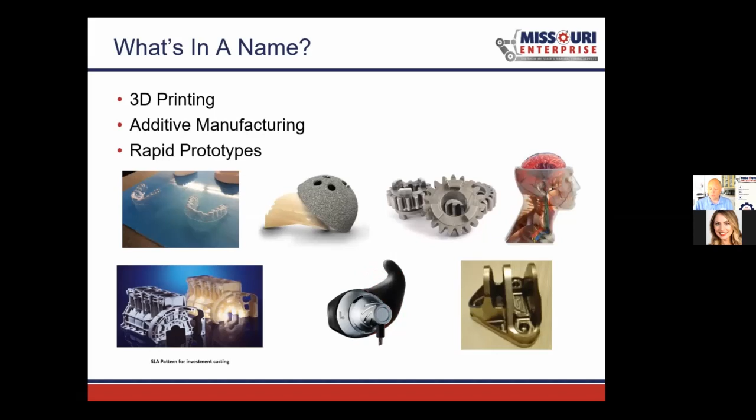This was the first major exposure. In 2013, someone came up with the idea of what if I 3D printed a gun? It hit the news everywhere, on all the different channels, and everybody was worried about this new technology and what that meant for the future. But really it was just something else being created with additive manufacturing. It's really not a good application for 3D printing for reasons I'll talk about, but it shows another example of what can be made.

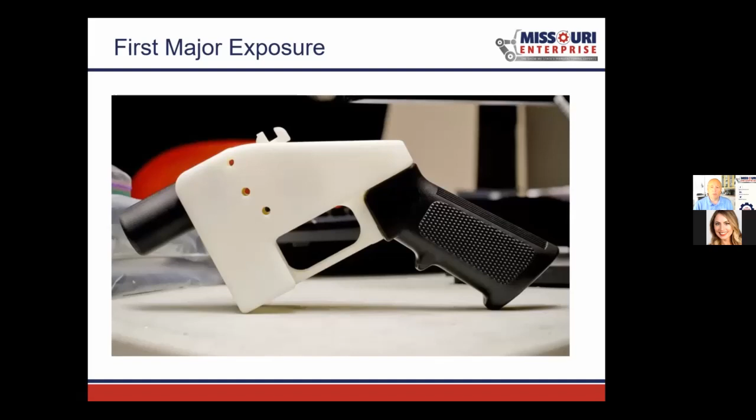So what are some of the reasons why you would or would not use this kind of technology? Start off with the cons. It is significantly more expensive than an injection molded part. If you're going to make a widget out of plastic, it's going to be significantly more expensive, and it's going to take a lot longer to make that part. But there's reasons why 3D printing is actually an advantage.

Sometimes there is some work you need to do after you make the part, whereas when an injection molded part comes out of the injection molding machine, it's done, it's ready to go. But sometimes with 3D printing, you need to do some post-processing.

Large parts are hard to do with 3D printing. It's becoming a little easier, but it is hard to do. And also the materials and the mechanical properties of those materials sometimes aren't nearly as robust as what you would find in injection molded or other manufacturing processes.

But let's talk about the pros of 3D printing. This is where it really shines: you can get very complex. You can have the whole thing come out of the machine and it's done. It's already assembled. Multiple parts can be built as one.

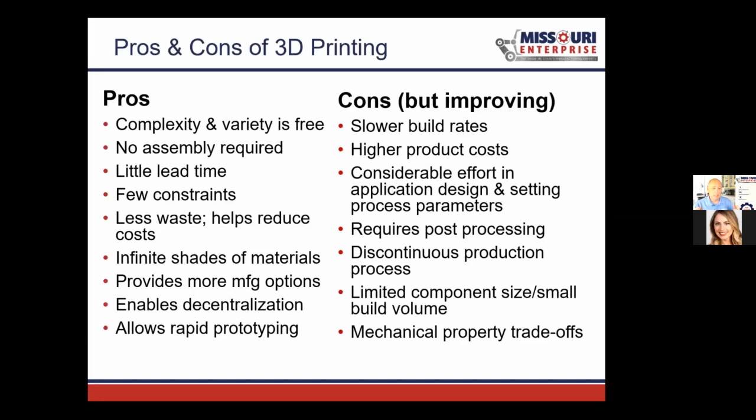But let's talk a little bit about the different types of additive manufacturing. We kind of break it into 7 different food groups here. I'm going to go through each one, explaining a little bit of detail about what that means. There's all different kinds of materials: plastics, metals, sand, glass, concrete. I've seen houses 3D printed out of concrete. Ceramics, even food. You can 3D print different types of food.

Now the food I'm showing in that picture there does not look overly appealing, but it's just a process, and it's something that can be done. Anything that can be liquefied or extruded, different things like that, can be made into an additive manufacturing product.

Applications, what are you using it for? You can use it for so many different things. And this list just keeps growing. Originally, it was just for rapid prototypes of the parts, but now they've realized you can make the molds out of it. You can make medical things, surgical. Medical and surgical are really growing because everything's custom, because everyone's anatomy is slightly different. You can use it specifically for the anatomy of the person that you're making the part for.

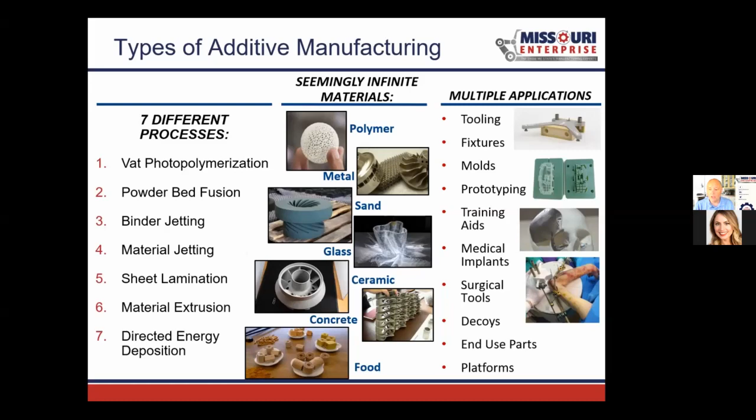So let me go through the list of the different processes and the advantages and kind of disadvantages of why you would use those. The first one is vat photopolymerization, which is a mouthful. Imagine a tub or a vat, maybe let's say a foot by a foot by a foot deep. It's a container. And in that container, there is a plate or a table. And that table is on a cylinder that can move up and down within that vat.

Now you fill that whole vat up with a liquid. It is a resin, or a liquid that's kind of a liquefied plastic. You take that plate, that table, and you move it down very slightly. What it's saying there is 9.8 ten-thousandths of an inch or whatever. So you can move it down a very slight amount. Then you take a laser or some kind of a specific light frequency and you shine it on that surface.

So if you think of a part, look at the parts on the left. Instead of looking at it as a whole, look at it as layers from the bottom up and just divide it into 10,000 layers. So each layer is shined with that laser. The computer just finds that level or that layer and shines the laser onto that liquid. Wherever that laser hits, that liquid will solidify.

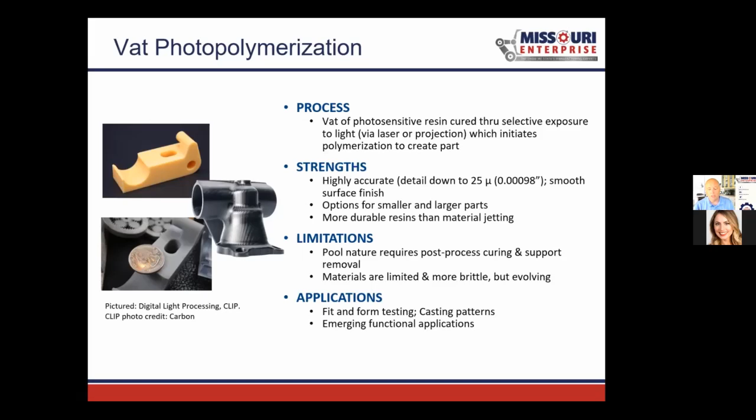One of the big applications is Invisalign braces. That's one of the ways that it's made. What they'll do is they'll scan your teeth with a sensor, figure out exactly where all of your teeth are, scan each one of your teeth in relation to the other. Then a dentist or an orthodontist using a computer program figures, okay, this is where your teeth are now. This is where I want them to be.

And then they use stereolithography to create a positive of your teeth, essentially recreate your teeth from their existing condition to the desired condition. And then they do a thermoform of plastic over each one of those molds, those positives that they made, and those become the Invisalign braces.

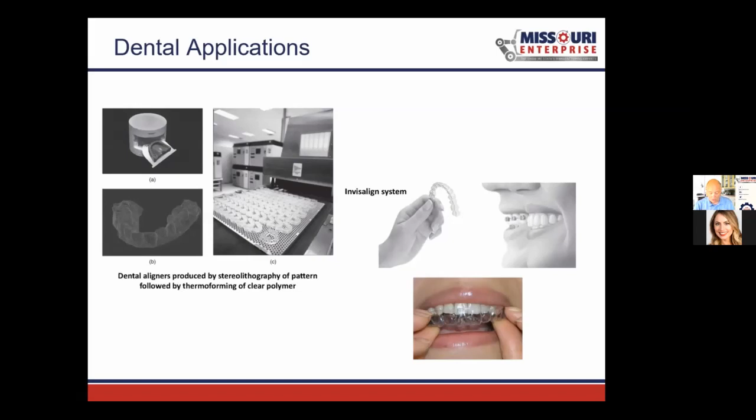Next one is powder bed fusion. This is also known as SLS, which is laser sintering. So it's pretty much the same process I just spoke about with the liquid, but this one is different in that you're using a powder. It's the same concept, there's a tub or a vat with a table on top of it, but instead of being liquid, a wiper comes across and lays a thin surface of a powder.

Then the laser shines, and anywhere that laser hits, it pretty much just melts that plastic or that metal together. So it kind of fuses it all together, and then the whole table indexes down, it wipes another layer of powder over it, and this repeats. This sometimes requires some post-production work. The surface is a little rougher, so it might need to be sanded a little bit.

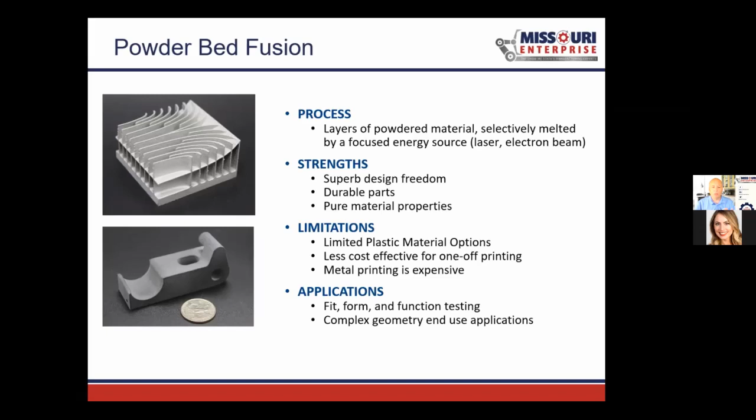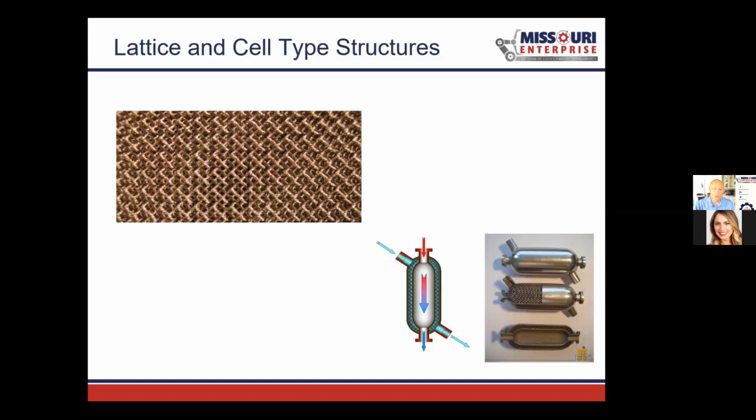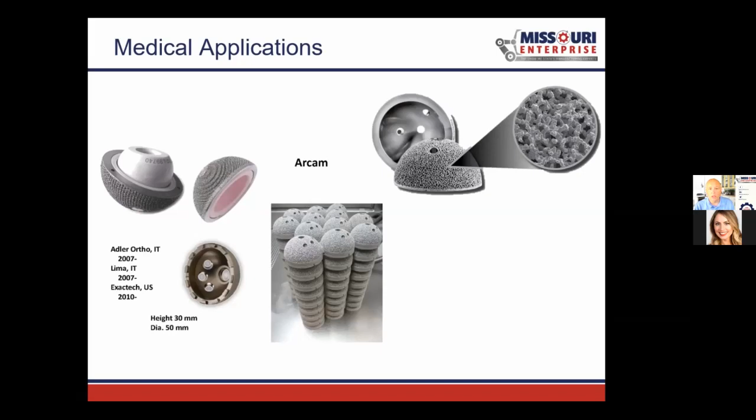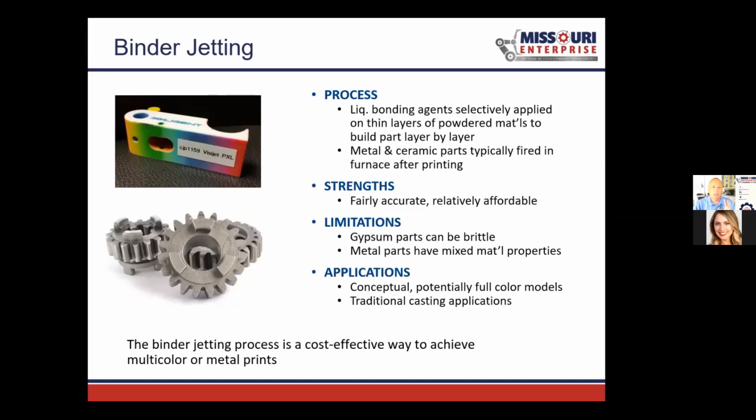These typically require some post-manufacturing. They'll sometimes have to go into an oven to set everything, or sometimes they're fired in a furnace, things like that. But it's great for integral colors. They can do a lot of different things with it, and it's slightly different than SLS, but it's kind of the same thought process.

Leading on to that, this was the next iteration, and it's really becoming big. I'm seeing a lot of companies use this. It's 3D printing, and this is where 3D printing really comes into play, in that it is an inkjet printer, or very similar to the process of an inkjet printer, but it's jetting the adhesive material.

It will deposit little drops of material layer by layer. It's the same concept with a surface that you're printing on, and that surface will either keep dropping down, or the ink gun, if you will, moves up. So either it moves up or it moves down. Sometimes there will be additional curing lights, maybe a UV light that has to shine on it and harden that plastic.

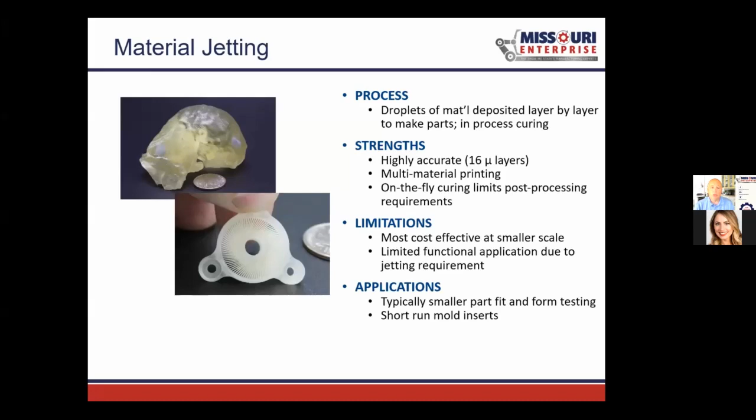One of the challenges with this is that you do have to have some support underneath it as it's being made. So if you had a part that was, say, T-shaped, you might need to put supports underneath it so it wouldn't fall down until you had a chance to get everything cured. But it's great for smaller parts, great for custom parts, fairly quick, and you can have integral lettering or words into it.

So if you're going to make a hearing aid for someone, you would make a mold of the ear, and then make everything from that. Now they can pretty much 3D print a hearing aid around the electronics needed for the hearing aid. So it's a step up on that process.

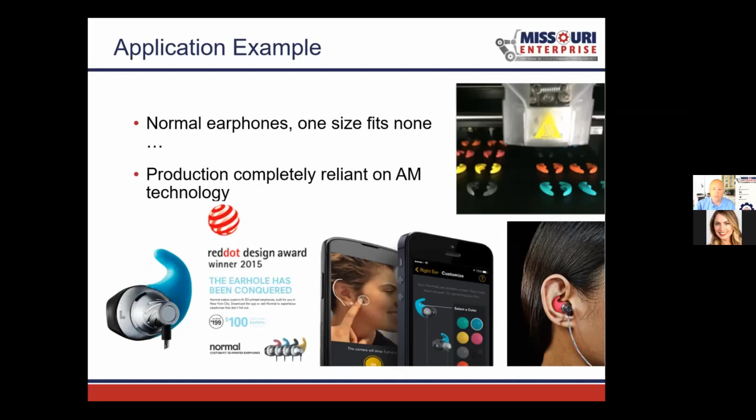Sheet lamination. Imagine a sheet of paper, a ream of paper that you have at your office, but each layer is cut specifically to a shape. It's essentially the same thing we've been talking about, but instead of a process of heating things up with a laser or a light, they're using paper or some other laminated material, metal, if you will.

It's somewhat brittle, and it's not as precise as you'd get with some of these other processes, because it's just a sheet of paper. So it's only as good as the machine can cut these layers of paper or layers of aluminum foil. But it's great for a quick conceptual idea, a little thought process, something like that.

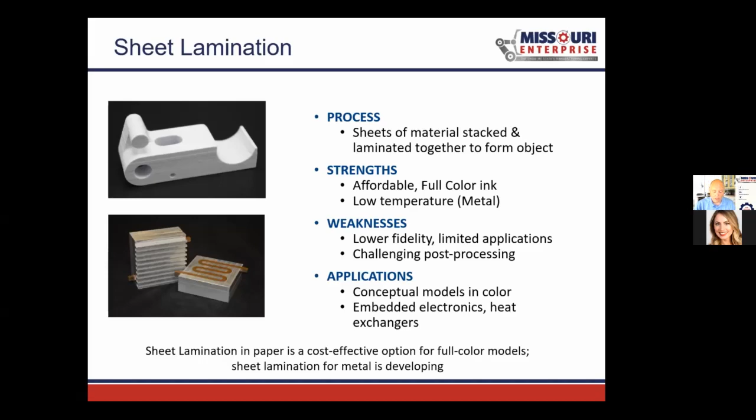Material extrusion. Now, this is the one that's very common right now. You can see these - I've seen these at Sam's Club. You can buy a 3D printer that...

It reminds me of back in the day when I was young, a Play-Doh extruder where you would put Play-Doh in and squeeze it down and get different designs to come out. This is very similar in that you have a string, like fishing line, a spool of material that's fed into a heated nozzle or orifice, and it just kind of goes around and prints a layer, then moves up and prints the next layer.

There's a lot of different materials coming out with this. The accuracy is not that great. You can always tell these parts when you look at them because they're kind of surface level - you can really see the different layers because it's a stepped finish. So it requires a lot of post-process work to make it nice and smooth, a lot of sanding, and it's kind of weak in the Z dimension, so it will crack in half.

But it's great for functional testing. You can use it to see how something feels in your hand. They actually use this - they have one of these in the International Space Station to make parts. So it's a very common thing to use.

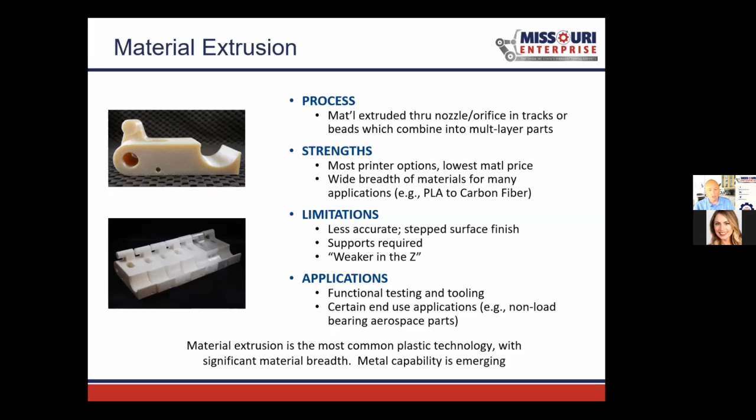There are some metals coming out now. There are challenges, but they're overcoming them pretty quickly.

Another process, directed energy deposition. This is the last one we're going to talk about today, but this reminds me almost of a welding process. But instead of having a welding rod that you're welding on, you're using actually powder - you can even use a wire feed itself, but you're using a laser to melt things.

So it's an additive process. Using a laser, it's very strong. It's not very precise, it's not very accurate. It's only used on certain materials, but it's great for things like repairing parts, strengthening parts, maybe hardening an edge or a surface. So that's one of the big things we've kind of grouped in with additive manufacturing.

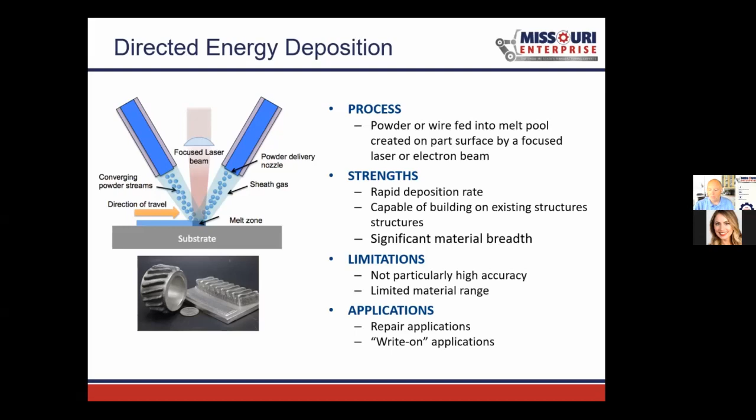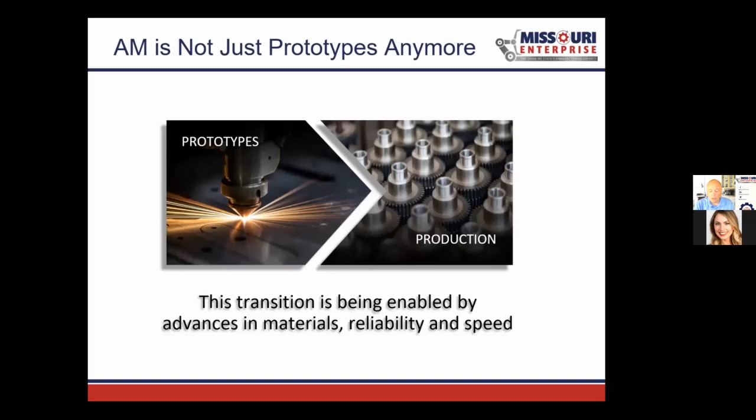This has been around in one form or another for a while, but we're adding it to additive manufacturing. So in the past, additive manufacturing has just been used for rapid prototypes. That's been the thought, but now we're looking more at how we use it in production. So it's got a reduced time and cost and improved efficiency when you're comparing it to a lot of one-off things.

If you're comparing it to molding, it's going to be slower and more expensive than injection molding. But making one-off parts is probably cheaper than machining a one-off part in plastic. So if you're going to hog out a piece of plastic or metal and make it, it's probably cheaper. It depends, and I'll talk about the cost breakdown here in just a second. But these are the kinds of things we're comparing it to: molding and machining.

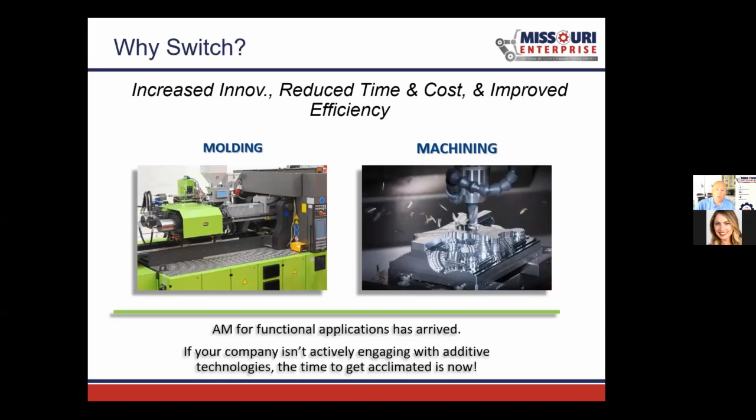So why switch? Because you're doing molding, you're doing machining now - why should I switch to additive manufacturing? I'm not saying it's going to replace either one of those, but it's probably a different arrow in your quiver that you might need to have.

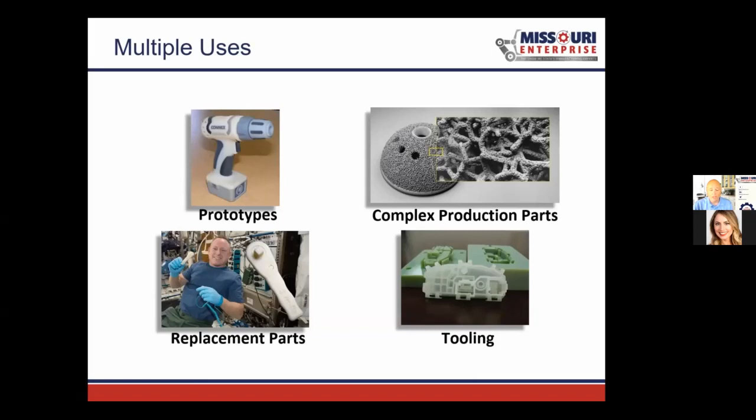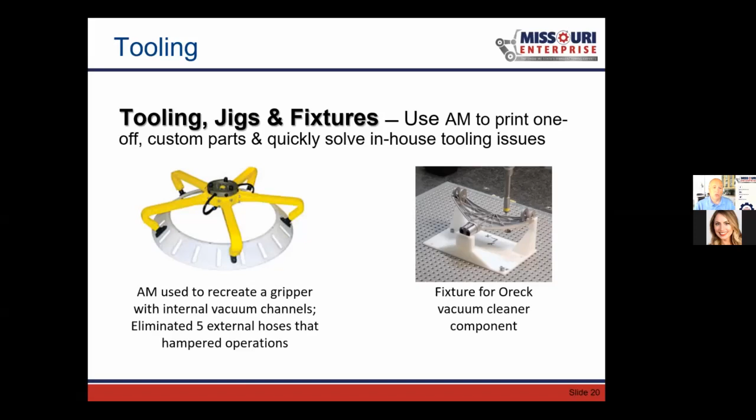You could make that whole thing, except for the suction cups, out of additive manufacturing materials, and you might even be able to make the suction cups. You can make it all as one piece. Then anytime one breaks, you just make another one. So you eliminate the hoses and all kinds of external parts that you'd need, just by doing it in additive manufacturing.

Repair parts. This is big, and it started off big with antique cars. There would be parts on an old Ford or old Chrysler or something that you couldn't get anymore. So they would do additive manufacturing to repair parts that were no longer made, so they could recreate or repair it.

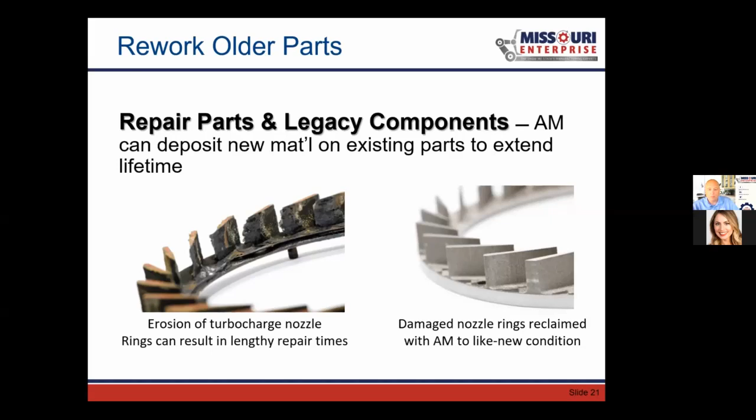Casting parts. Casting is kind of new in additive manufacturing, as far as I've known. It's only been a couple of years that I've seen this, but now if you're going to make a part out of a sand cast, you can make the sand cast mold for pennies, if not a dollar or two. It's very, very inexpensive to make a sand cast mold.

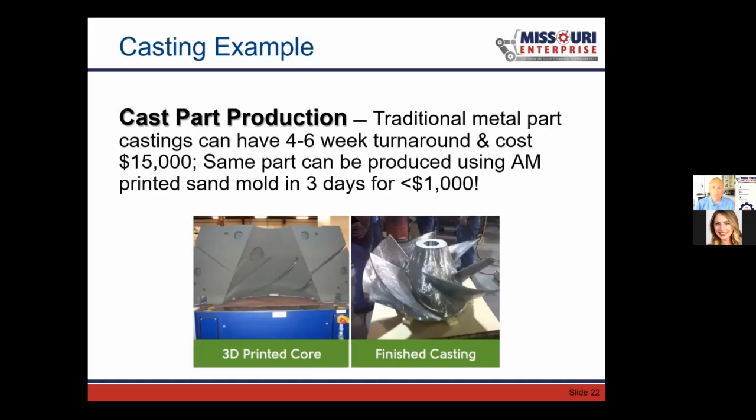Prototyping. This is where I originally was exposed to this process, to additive manufacturing, and it's one of the areas that's still used. I still use it regularly. I do product design and development for Missouri Enterprise.

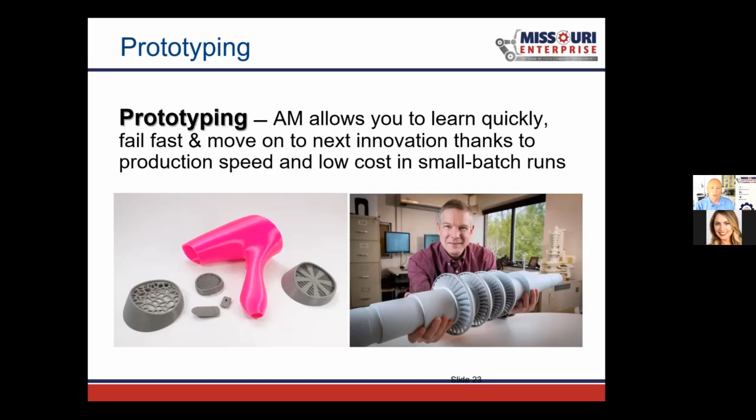You can use materials that are very close to the finished part, so you can see how it would fit together. Now, if it snaps together, you may only get one or two snaps — you're not going to get it repeated over 100 times — but you'll get the idea of whether the parts fit together. So it really gives you a good head start on how this would look, how it would feel, how it works with other parts.

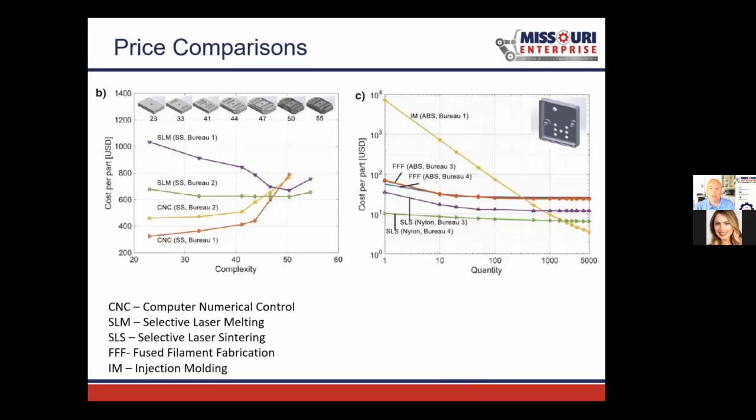So you're going to get a part produced. What does that mean if you've never used additive manufacturing before? Well, the first thing that probably has to happen is you need a CAD-based 3D model of what you're going to make. That's usually the biggest challenge.

A lot of companies now, smaller companies, don't necessarily have everything on CAD. That's not a huge challenge anymore, because you need some kind of 3D CAD system. So if you're just dealing with 2D AutoCAD, it might not work. You're going to need it made into a 3D model so you can see all the different sides and all the different parts. From there, you create an STL model, which is a generic file.

Then the 3D printing company, or your software if you have your own 3D printing equipment, slices it into layers, and then it's produced. Sometimes there is some secondary finishing required, whether it's sanding, sometimes it's a little fill. Surprisingly enough, they use a lot of super glue to fill in and smooth things out, so you can get a very smooth finish. You can get it painted, you can get different types of sandblast finish, different types of finishes.

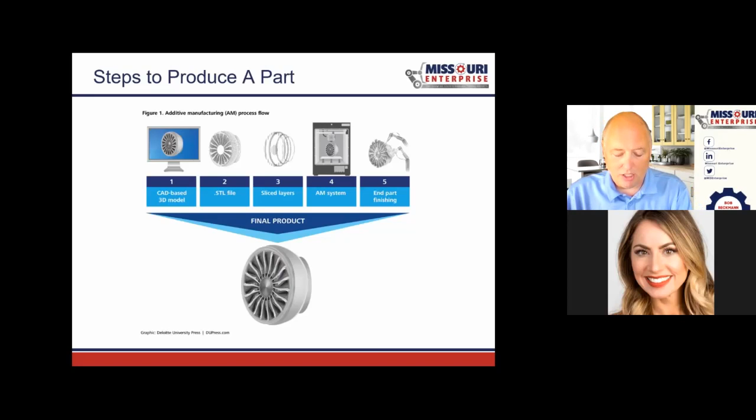But so those are the steps. So usually the biggest challenge is step number one, making sure that something is in CAD. So let's say you have it done and it is done in CAD. So what do you do next? Well, you go to an online pricing or quoting system.

That's how it's priced. They don't really even look at the complexity. Now they might look at the detail, how fine, maybe you have letters imprinted into it, and it's maybe a quarter of a millimeter deep or something. So they might say, well, the resolution isn't there that you need.

You can get some parts made, and I have a client I work with regularly that gets parts made. They're doing some parts that are used in the plumbing industry. So they get parts made out of clear material so they can see what's going on internally, where the water is going, what happens, how it goes one way or the other. You can get the materials in different colors, different surface treatments, you can get it painted.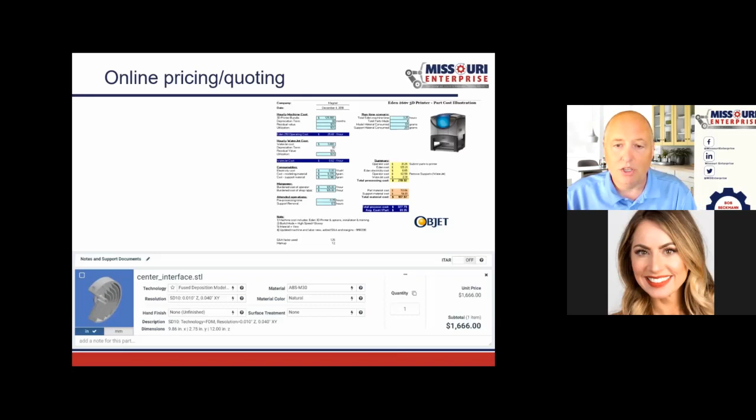It's very simple. The beauty of it is, when you're designing for additive manufacturing, we talked about that CAD design a couple slides ago. One thing you have to look at is maybe you need to change your design. That's Missouri Enterprise. We do a lot of that. We're working with companies that are switching to an additive manufacturing process.

You have to do a little bit of redesign up front, but from then on, think of all the labor you save, the assembly labor, the maintenance, the different part numbers you have to maintain, the screws, all that type of stuff is gone. You just have one part, and you can ship that part out by itself.

There's no tooling whatsoever. So if you decide to change that internal divider and want to move it over a quarter inch, you don't have to change the tooling, you just change the model. So it makes it a lot easier to do. It's lighter. It's used a lot. That part is probably used in the aerospace industry because 3D printing is used significantly in aerospace.

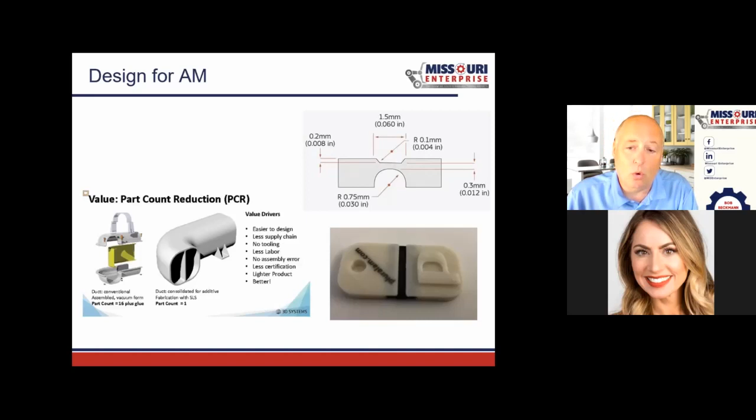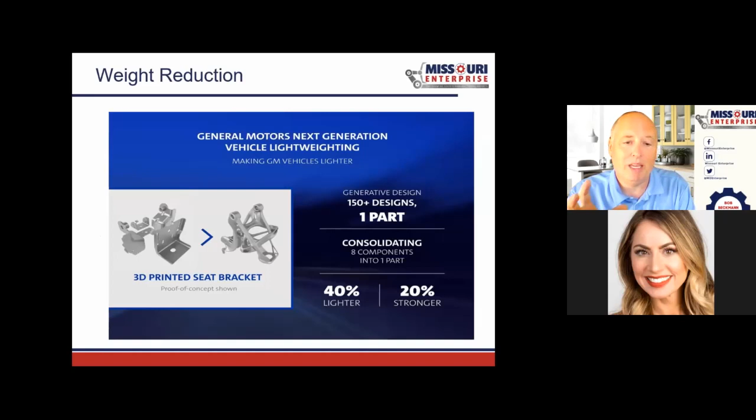Used a lot for weight reduction. Cars use it, or automotive manufacturers are using it to make brackets lighter. You know, instead of taking multiple parts and clamping them all together, screwing them, welding them, tacking them together, they are able to make it all out of one part because they're using additive manufacturing. A beauty of it, a way that they do this is they do a strength analysis of it.

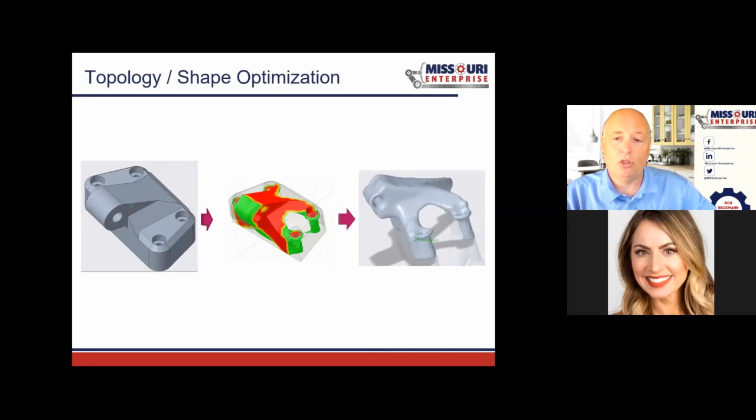So here's a part on the left that is a clamp, and then they did a strength analysis of it, and you can see from the picture in the middle, these are the only places where the loads are flowing. Any place where it's not colored, there's almost zero loads. So they redesigned the part on the right. They take all that material out that they don't need because it does absolutely nothing but sit there and look pretty. So the part on the right is just where the loads go, and that way you've taken out all kinds of wasted material. Designed for additive manufacturing using metals.

On the left is a manifold. It's an air manifold for a hydraulic system. You can see all the different clamps that come off. They have to make sure that they're oriented in certain areas. You can imagine how tough that was to drill. You're cross drilling, you're plugging the holes after you've cross drilled. Anybody that's had to deal with these kind of blocks, these manifolds, knows what that means.

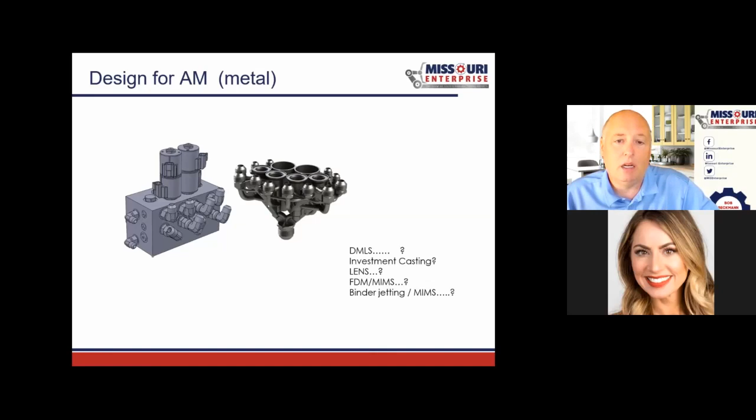On the right, everything is being done exactly the same, but it's all molded in one additive manufactured part with these internal grooves, everything already built in. So it's already completed. So you can change your design for that. Sand molds, as I spoke a little bit about, you can do things with sand. You can create that same part I just showed using a sand mold. So you kind of do a sand casting of it. So again, very inexpensive way to do this.

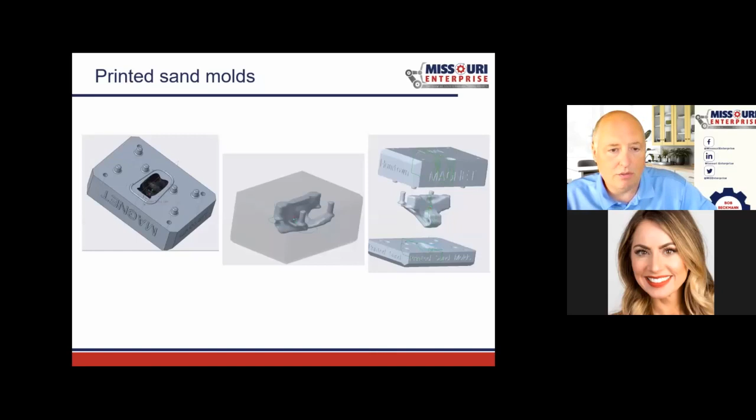So there have been a lot of changes in the software. So instead of using just STL files, now in the CAD files themselves, they are getting to where you can change the color. You can see the pictures below. Those are all done with additive manufacturing, and within the software, they're able to do a whole rainbow of colors, any kind of design, the artwork, and that's integral to the part. It doesn't have to be a secondary operation, doesn't have to be painted on, doesn't have to be silk screened. It's already built into the part, so you can save a lot of money in the production.

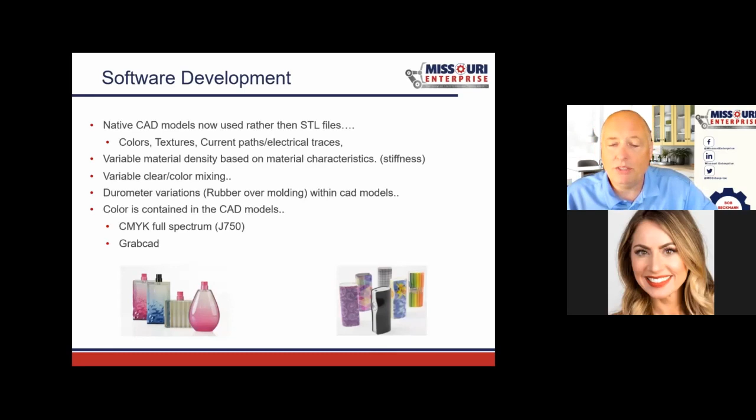Question, Bob, do you know if there's any restaurants out there that are currently serving 3D food items? Because if so, that's fantastic, but I'm just curious. Can I go to Starbucks? Am I going to get those little egg bites? Was that made by a 3D printer? I've seen 3D printed food. It is not. It is exactly in the country that you would think it would be in. It's in Japan. Yep. They're doing 3D printed food in Japan.

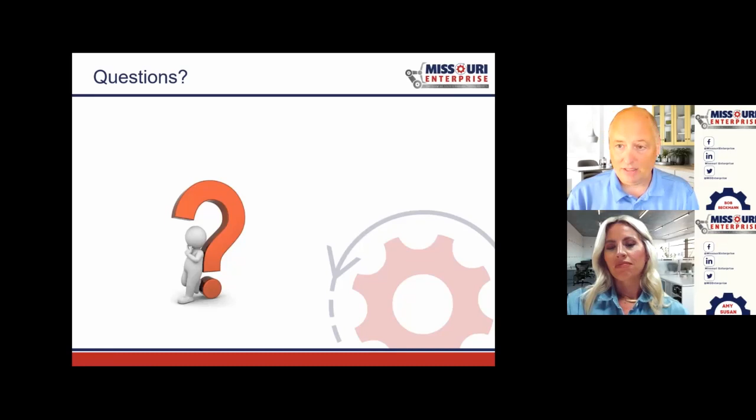They're doing different types of noodles and things like that. They're 3D printing a happy birthday type thing out of noodles, or those type of things. So that's the only place where I've seen it done. I've seen extruded type food, but that's pretty generic. I mean, a Twizzler is an extruded piece of candy. Yes, but to get more complex, they're looking at 3D printing cake toppings and things like that. I have not seen anything where they're 3D printing artificial eggs or anything like that yet. You can't just 3D print some meatloaf for dinner yet.

Well, you probably could. I'll be right behind you tasting it. So. Can you tell that I haven't eaten lunch yet?

Okay, we do have a couple questions here I want to send your way. One is, does MEP have the ability to provide vendors access to 3D CAD systems? And that's from Rachel. Rachel is one of our students. Okay. Hi, Rachel. 3D CAD systems. MEP, the quick answer is no, but there are a lot of 3D CAD systems that are available fairly inexpensively, if not free, online. The problem with that is the robustness of them. You're going to be limited by the free versions that you can get online.

So they're the light versions, essentially. Yeah, it's going to be the light versions. So you're going to lose a lot of the filleting. You'll be able to make shapes, but some of the very fine details, it'll take you a lot of extra effort to make some of the more complex shapes. The problem is the financial model they're working under; they're trying to make money by selling the software. So sure, there's some limitations. So unfortunately, no.